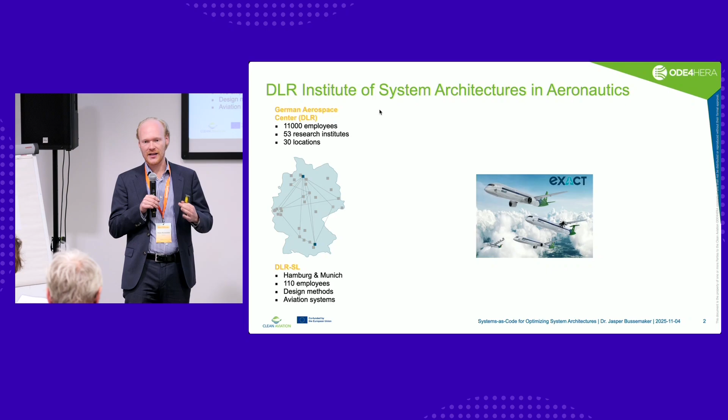I work at the German Aerospace Center. We're the national research agency for aerospace topics, and also the space agency for Germany, located throughout the country with many different institutes with different focus areas related to aerospace. I'm working at the Institute of System Architectures in Aeronautics, so we deal with the system level aspects of aviation systems. We're in Hamburg mostly, a little bit in Munich as well, with about 100 employees working on aviation systems, like what would the next generation of green aircraft look like, but also on design methods.

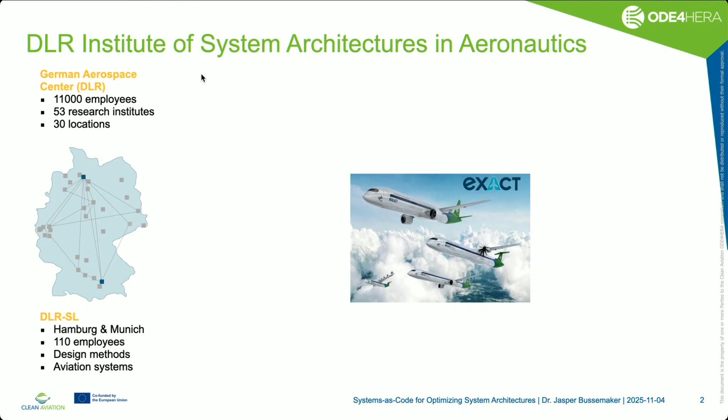So how do we actually design these things? That's relevant, of course, for what we're discussing here tonight. If we're designing such aircraft within the DLR, that looks something like this. There are many different disciplines that we integrate and connect to each other, and have to make sure all the engineers involved speak the same language and exchange data in the same way.

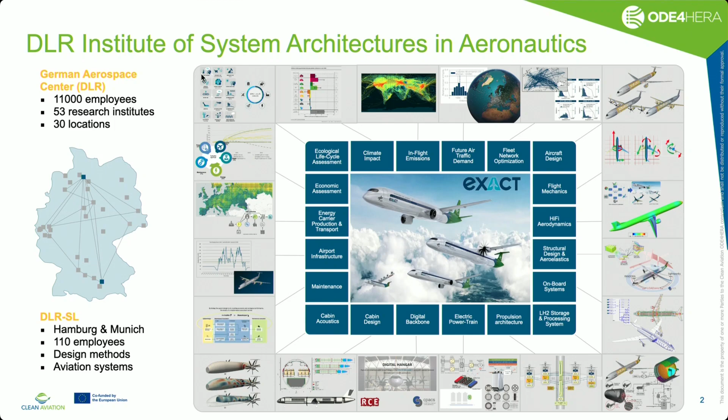And that works quite well. We started these developments, these efforts, this experience about 20 years ago with a data format called CPACS. It's a way to parameterize a complete aircraft design, and that looks something like this. We also have workflow execution platforms, so we can execute analysis and simulation tools that take CPACS as an input, do their calculations, write the results back to CPACS.

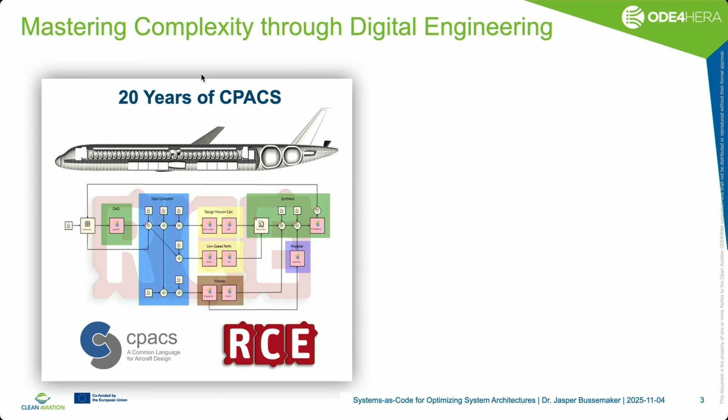And then converge that in a multidisciplinary optimization loop. So a lot of experience here, but just for aircraft, in the aviation domain. At the same time, we realized we need to expand our horizon a little bit to also look at more typical systems engineering tasks like requirements and architecture, and also maybe look at other types of systems. So we're working on that, developing the next generation of digital engineering platforms, mainly in the ODE4HERA project, but also in some other efforts internally in the DLR. Here we try to connect many different authoring and systems engineering MBSE tools together in one digital thread.

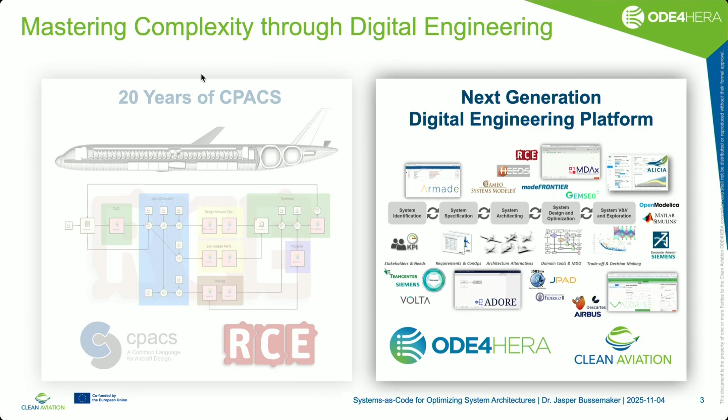Before I show more about this project, I would like to show a little bit of what we want to achieve in the end, namely the highest level of design automation that you can achieve over the full conceptual design phase, not the complete life cycle of the system. This is called system architecture optimization, or system architecture design space exploration. The idea is that we have an optimization algorithm, a numerical, classical optimization algorithm, not an LLM—that's why I asked the question before.

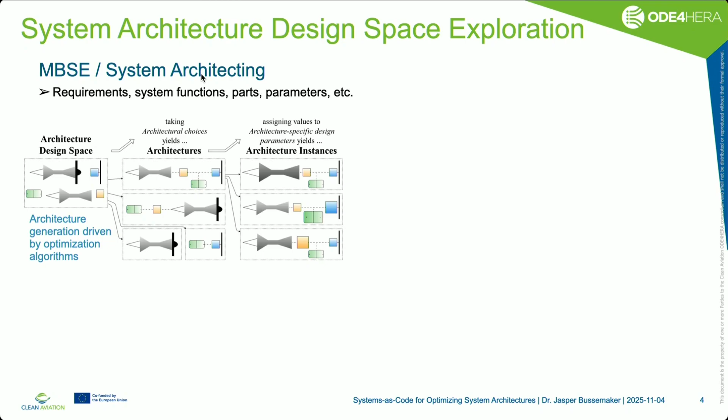Generating architecture: we have an architecture design space definition, and from there we can create architecture instances, also more specific ones with different design parameters per architecture. Once we have this, we also have, on the MDO side, the multidisciplinary analysis side, all this experience I told about before, about how to design aircraft, for example. So we can run the analyses using all the different engineering disciplines involved and the specific engineering tools.

And we want to connect these two worlds. So once I have an architecture that was automatically generated, I want to synchronize it to, for example, CPACS—but it could also be other data formats—and then automatically run my multidisciplinary analysis and get the performance out to do trade studies and design space exploration. By doing this, we get the full architecture level or system level impact of new technologies we want to integrate. That's very interesting for research organizations, but also in general for companies who want to see how new, maybe subsystem level components, impact the design at the system level.

We did this in some small test cases, but we're not there yet at the full multidisciplinary analysis level, let's say. But we're working on it.

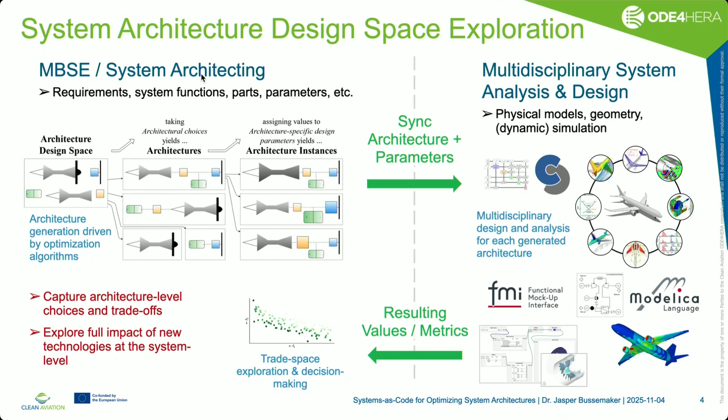For that, we have a central ontology. The project didn't start out as a SysML2 project, but we compared different data alternatives and modeling languages, and we did arrive at SysML2 because there's really not a way around it nowadays, and it seems to be ready for the future. It's a research project, so we can afford to be innovative.

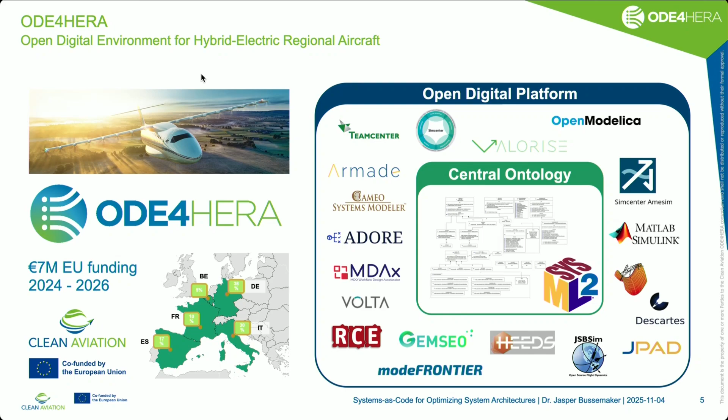So we're developing this central ontology, and the way we're doing that is by first discussing what kind of stuff we want to put in there, what kind of concepts we want to represent. This is all quite standard MBSE digital engineering stuff, so we're not reinventing the wheel too much, at least for now.

Then we look at SysML2, what it can already do natively, and then also develop some relatively small layers of extension libraries on top of that, and then connect authoring tools there. So far, not so crazy.

Maybe it's interesting to mention that we also want to look at both commercial tools and research tools. What's interesting to highlight is that the top process is really this typical collaborative process where you need all your experts involved to discuss what should we put in the ontology and how should we represent it.

For this, we found the SysML2 code process to work very, very well, and as we also saw in previous presentations, we're just using Git, so nothing special there either. And then SysIDE Editor, because it's free and nicely accessible to everyone, so everyone can be involved in the discussions. In the end, we also want to publish the libraries we're creating on Sysand.

I was hoping it would already be the case, but it takes some time to get all the partners on board in a big research project. So that's the technology stack we're using here.

It works very well. And then for connecting the authoring tools, in principle all of the project partners are free to choose how they want to do it. But most of them arrived at SysIDE Automator, because most of our research tools, for example, are already written in Python, so having a nice library for parsing SysML2 files in Python, this is the best that's out there.

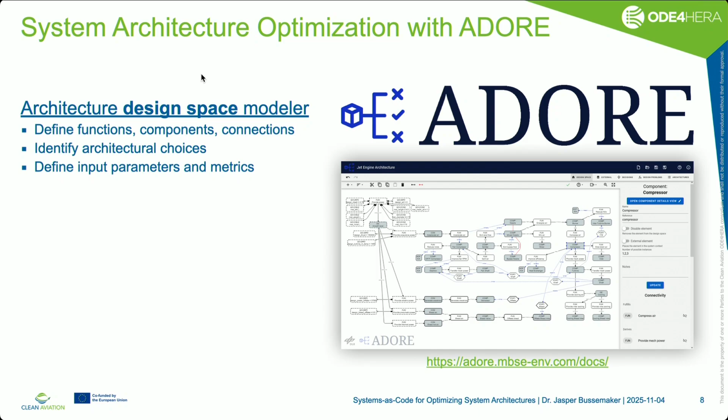You define your functions, your components, you link them to each other, you define your architectural choices, your metrics, your design variables. Then you can use that to generate your architecture instances, but most importantly, you can use it to specify your formal optimization problem and then link to optimization algorithms. So you can actually automatically find your Pareto front of optimal designs, optimal architectures.

And what that looks like, I'll show now in a short demo. It starts with some requirements that we've generated with another tool of ours, all model-based, so nicely referencing to objects and having different parameters and semantic constraints in SysML2.

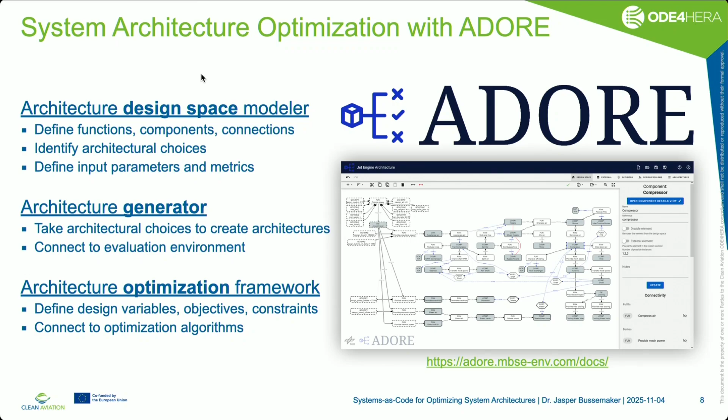And then we can connect it to system architecting. So we got here some requirements, referencing systems and functions, parameters with units and semantic constraints.

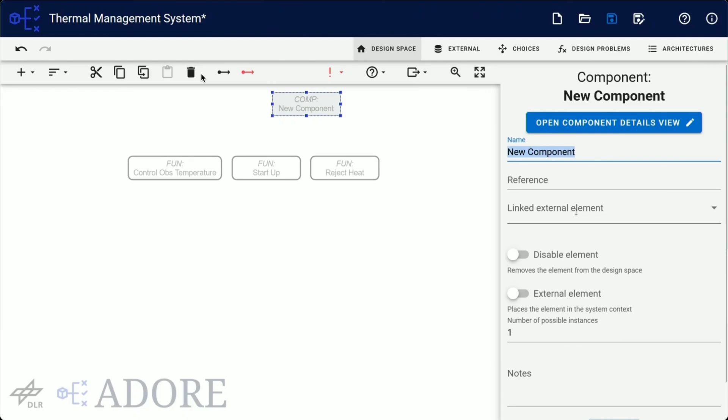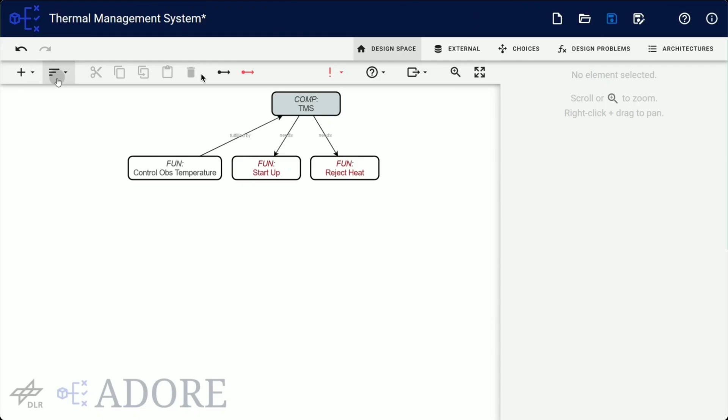Then we import this in Adore, and we see here the functions from the systems, and we can create components and link them to existing parts. Name is synchronized, for example. Here we declare that some functions are fulfilled by the component, but the component also needs additional functions.

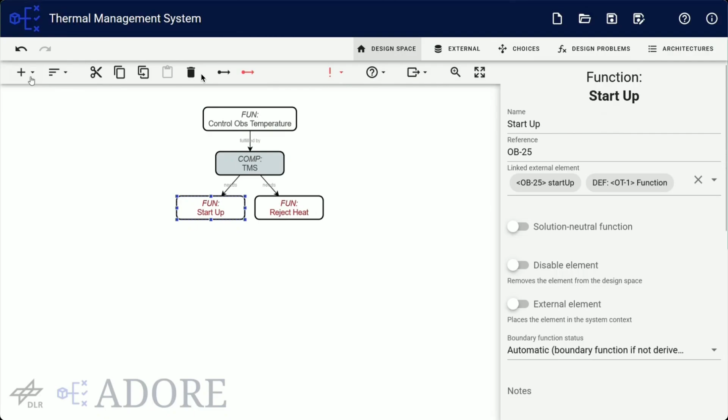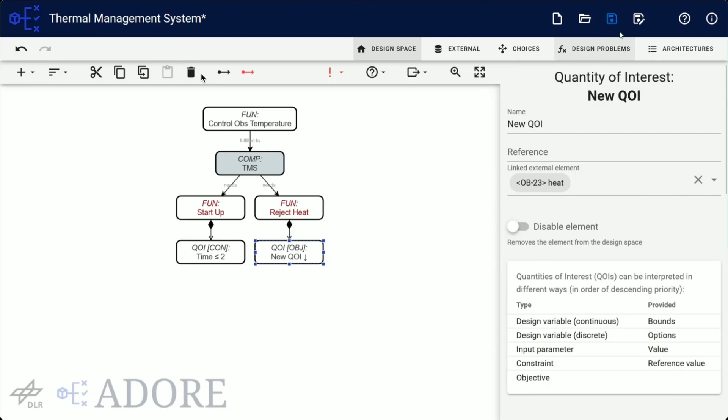And then this is synchronized back into the architecture design space. So here we see that being created. And then to the functions, we can associate quantities of interest that we can link to existing parameters. Behavior, let's say this inequality and the number, they're automatically synchronized. So there's no data duplication, it's really coming from the SysML2 model.

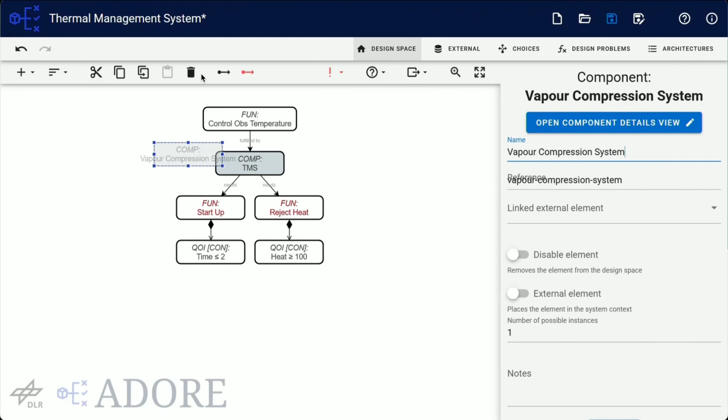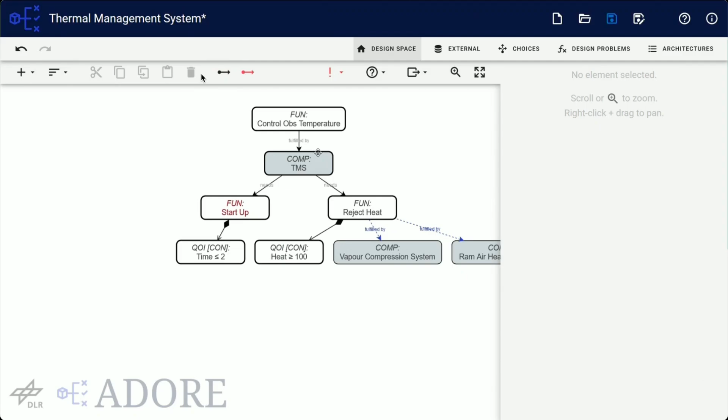And then we can continue modeling. We can define additional layers of components for fulfilling our functions. For example, for rejecting heat, choose a vapor cycle system, or a ram air heat exchanger. And you see the color of the arrows change, so that means we now have an architectural choice.

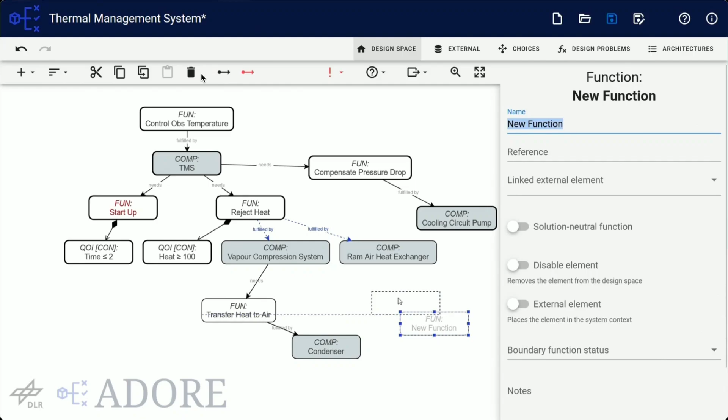And we can continue modeling like this. We have additional functions that are being induced by the components. One thing I want to highlight here is that this way of modeling the design space, we're modeling it as a directed graph, not a tree.

So we can actually also have different components pointing to the same function through a different path, let's say. Like in the end, both components here, they need ram air, and that's modeled like this. It was very powerful. We have an additional needs-action link here to declare that if I choose a different part, a certain part also needs additional actions to be included.

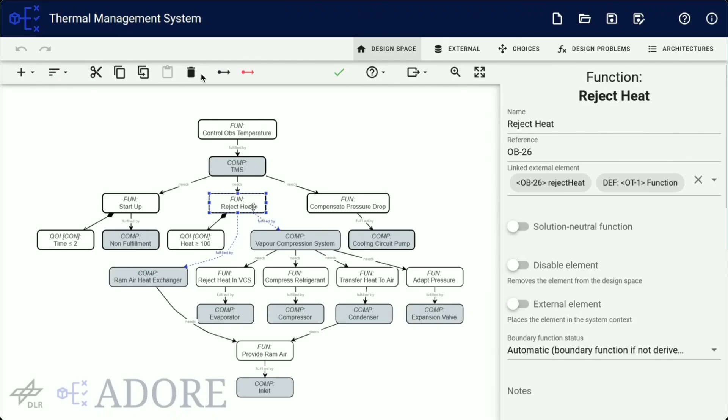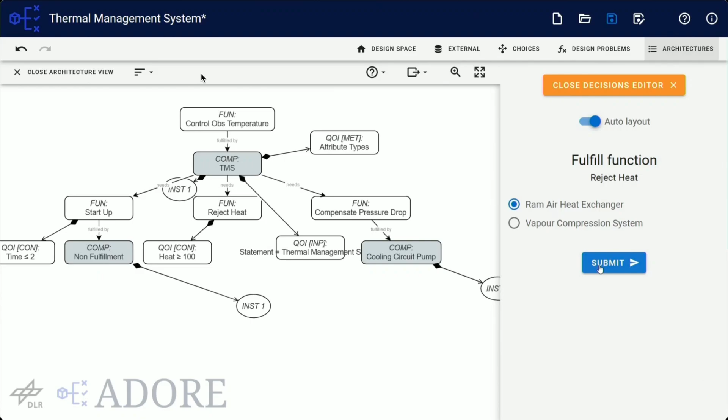And like this, we can model our architecture design space with full bidirectional synchronization to SysML2. So we have our architecture choice here. We can manually create an architecture to validate that the behavior of the design space model is correct. And like this, I've created an architecture instance where I select a ram air heat exchanger to reject heat.

And I want to go to the next. So to conclude, a little demo of our next generation engineering platform, what we're working on to connect everything by SysML2. I showed the specific use case of using Adore to model architecture design spaces. And then the ontology development we do with the free tools from Sensmetry basically and Git. And then the two connections are now mainly done with SysIDE Automator.